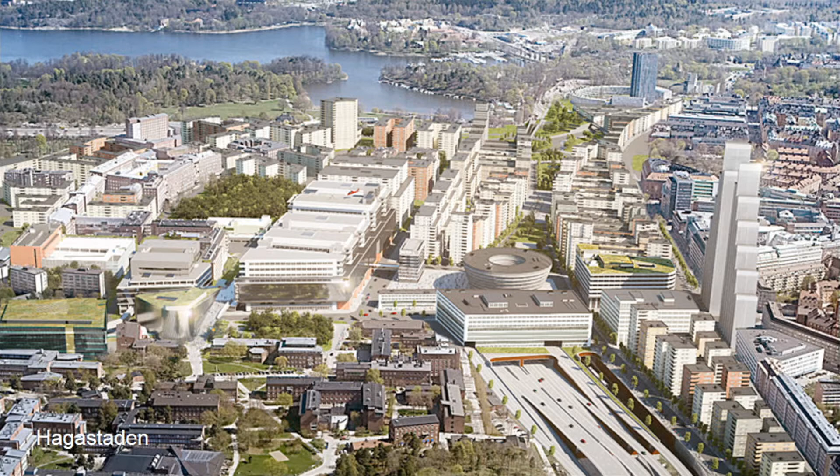We know cities are becoming more dense. That's not really a news flash. Here's Stockholm's, I guess, the most dense area we've seen planned in Sweden. It's called Hagastaden, in the north of Stockholm. The reason I point this particular area out is it's been a bit of a flashpoint with urban density and daylight regulation. Here's an example of one of the projects which has caused friction in the system.

What you see here is a very old sketch. I don't want to be too specific here. A lot of these people are my clients. They're my unwilling clients. Why? Well, they have their projects well designed 90%. They go to get their building permit, and the permit is denied. I get some very interesting phone calls from panicked people trying to fix the problem. With a 73 degree obstruction angle, it can be very difficult to fix. And actually, I see just now that there's a balcony there, so there's no view of sky there whatsoever.

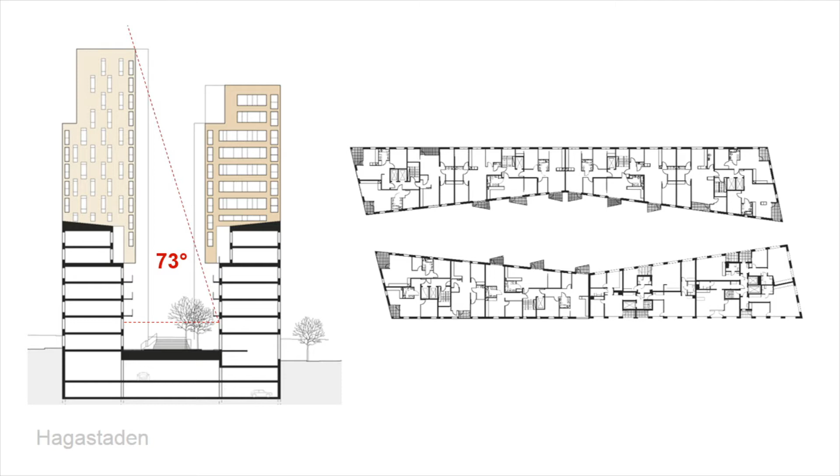So this regulation, what is it? Marie-Claude went through it, so I'll just focus on the idea of good access to direct daylight. We saw there's a daylight factor or a window to floor ratio there.

One thing we know is that the focus of the regulation is on the building level. But we know a lot of the damage is actually caused here in the early planning phases. And in Sweden, there are no daylight regulations for the early planning phase. That's where the problems arise.

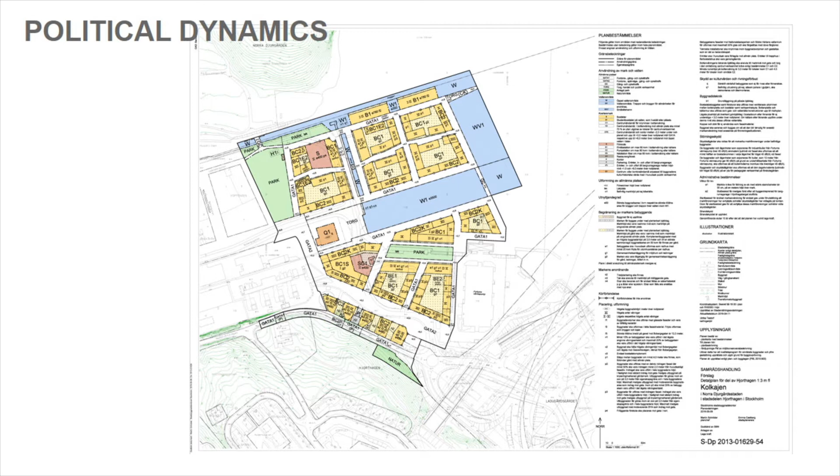So here's a bit of the political dynamic. The politicians want a tight or a dense city. They want to meet their housing quotas. So they put pressure on city planners to plan very densely. Then they pass that along to the project team, who then passes something on to the permit issuing city planners. But they, of course, have to answer to the code authorities. They're under tremendous pressure not to allow exceptions to the building code.

So there's a bit of a fight here, and essentially what happens is the code authorities, they really should be talking to the city planners, but they don't. These are the people we need to talk to. So there's a flashpoint there. These poor people are caught in the middle. So what happens? They put a stop to the building project. The whole industry is not too happy about that. There's a lot of time and money involved here, so people get upset when those two things clash.

So what's our idea? How do we fix the problem? Well, there's floor area ratio. I don't know if it's a standard planning metric, so for those who don't know, it's the ratio of a building's total floor area to the size of the piece of land it's built on. We use a definition by the Swedish Rådberg, but it's floor area ratio.

And we take vertical sky component. How many are familiar with that metric? Show of hands. Okay, I'll quickly review: it's the ratio of daylight falling on a vertical surface to the daylight available from an unobstructed CIE overcast sky. This is defined by the Building Research Establishment in those two documents. Now, this is not new, it's been around since the 60s. We are not reinventing the wheel, not one bit.

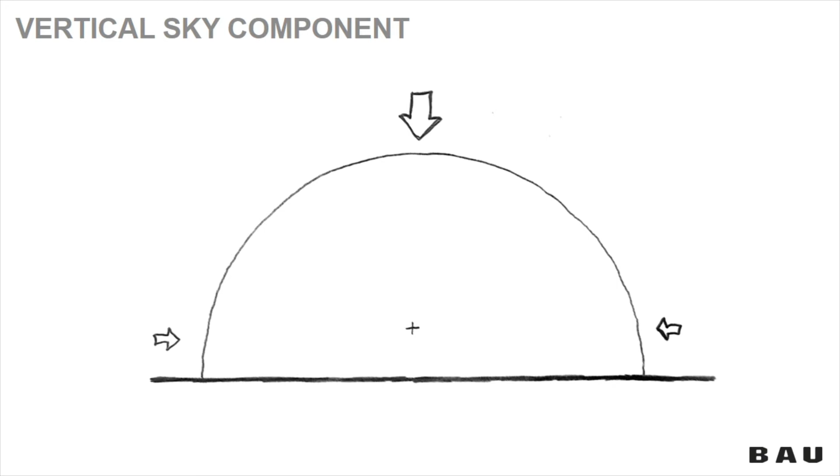Vertical sky component, a little more for those not familiar with it. There's my CIE overcast sky, which is the same sky we use to simulate for the building code, 3 times lighter at the top than at the horizon. It gets 100% VSC when unobstructed, 100% of the light falling from the sky. If I put a vertical surface up, a wall, it's obstructed, so it only gets 40% of the light from the sky. If I put another building there, it's further obstructed, 20% of light from the sky.

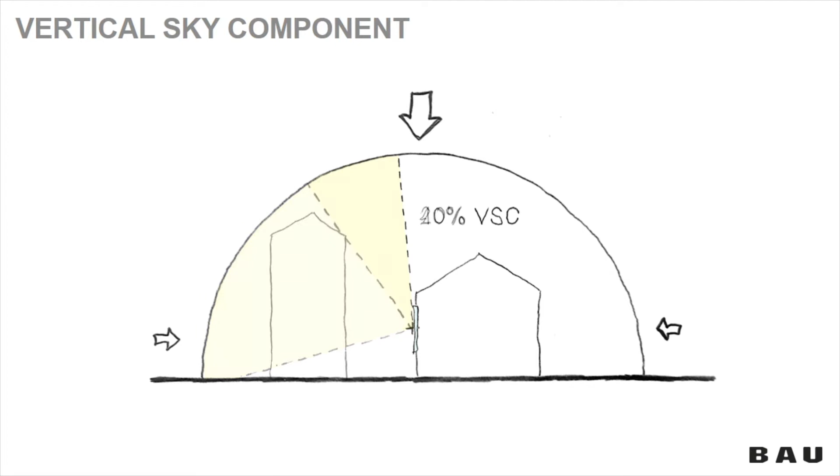If we move this to 3 dimensions, here we've taken a quick model of Victoria Station in London. You have to excuse this model, some of the buildings are hovering, this was an early test. What you see here in yellow is the 100% VSC, those surfaces receive all the light from the sky. The surfaces in green receive around 40%. And the surfaces in blue, you can see there's a range here. What it means is we know there's a point on those facades when essentially the daylight is choked off. There's none available.

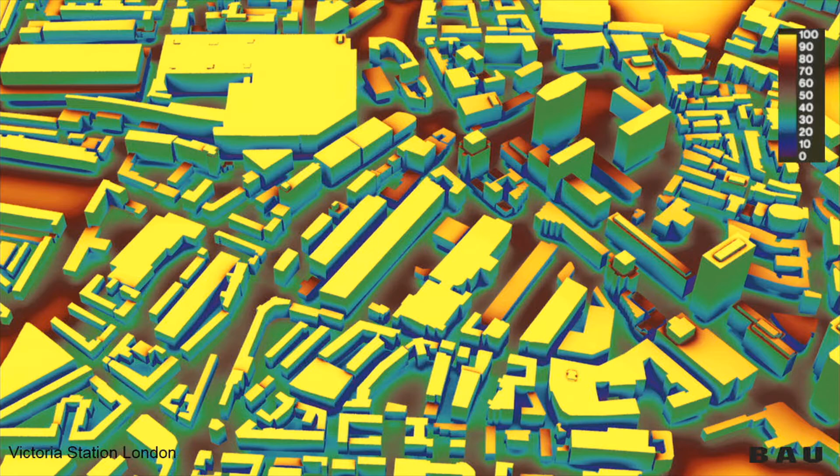So our idea, we have the two consultancies, BAU and Bengt Dahlgren, and municipal authorities on one hand. Behind us, we have Boverket, the code authorities. Unfortunately, they don't give us any money. They're not in the habit of funding stuff. But what they have provided us with is a letter of support, and that's been crucial in opening doors.

So we ring up the municipalities and tell them our great ideas, and they're already familiar with the problem, perhaps. So getting agreement from them is, in many cases, not so hard. They come back, select some neighborhoods, and give us three-dimensional data of the models of the urban districts they're interested in, along with floor area ratios.

The idea is that we will produce for them a catalog, say 30 here. We're still not sure if that's 30 or 40, or just when the money's going to run out, but 30 or 40 neighborhoods - a catalog which compares VSC against floor area ratio numerically. Now, of course, the catalog will have some nice, pretty pictures of urban districts to get the architects looking at the more intuitive pictures.

Now, we're not doing this for free. We get approximately €2,000 for the commune's participation. Does that cover our costs? Not at all - it covers maybe a third of our costs. So why do we want money from them? Isn't that just a pain in the butt? Well, no - at the end of it, we get to say, here's your study that you helped pay for, as opposed to, hey, do you want to look at our study? It's not a big fee, not a lot of money for them, but it gives us the opportunity to tell them that they have ownership of it.

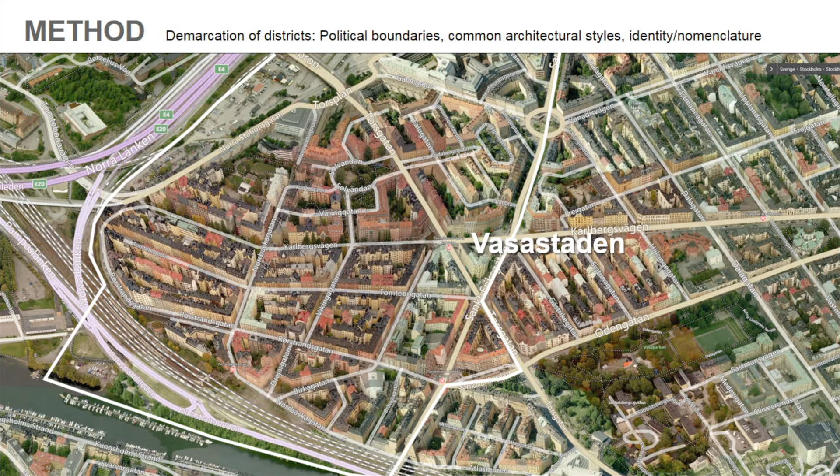So a little bit about our method. It's kind of complex when you're trying to figure out what's an urban district. We know we've got political boundaries, and here in the white you can see a political boundary - this whole area is referred to as Vasastaden. Well, how do we begin to divide that up? There are three areas, Rödabergen, Birkastan, and Rörstrand, that we've started to look at. The basic idea is we're looking for something that has an identity to the general public - so I can say, oh yeah, the Birkastan area, and people know what I'm talking about. That's the most important thing. But also we keep these districts approximately the same size, so we're talking 10 to 15 hectares.

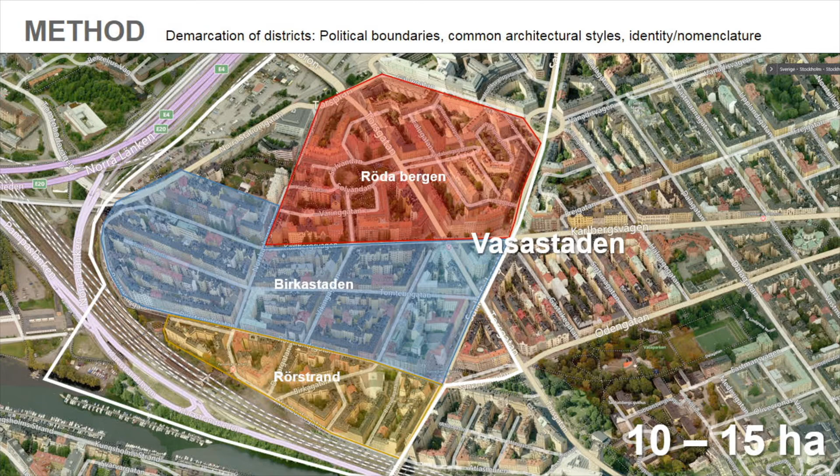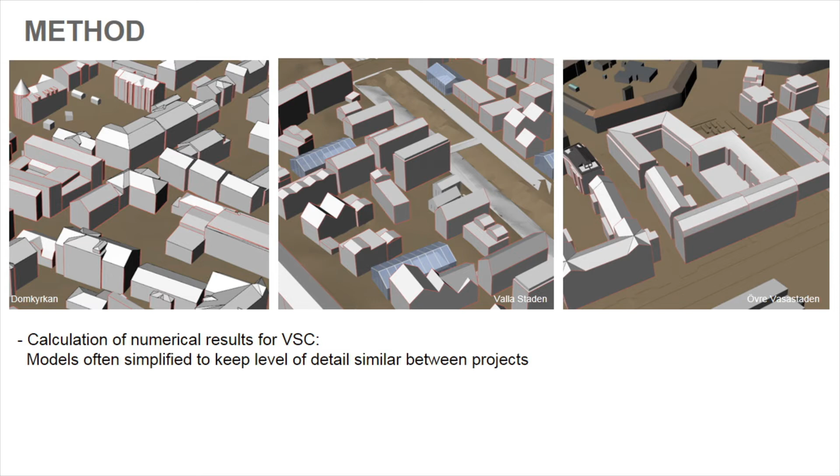Now, when we get the model from the communes, they're of differing levels of detail. So quite often - Micho, where are you? He's right there - there's a lot of simplification of the models in post-processing. This is so we can get the approximate geometries at a similar level. We do calculation using Rhino, Grasshopper with the Honeybee suite, and of course that has the Radiance engine to it, with a grid resolution of 1 meter by 1 meter.

So a little quickly, the results. We're still sort of in the middle of the project, but I'm just going to show you some of the images to start, then get into the numerics of it. Here you have a look at that Hagastaden area, and you can see these areas of dark blue. From our experience, we know that those areas are going to have real difficulty complying with the Swedish code. It would be great at the beginning of the detailed plan phase, as soon as pen hits the paper, to know this, so it doesn't come as a surprise. Because I'll tell you what - when they didn't get their building permit, they were very surprised. They had no idea.

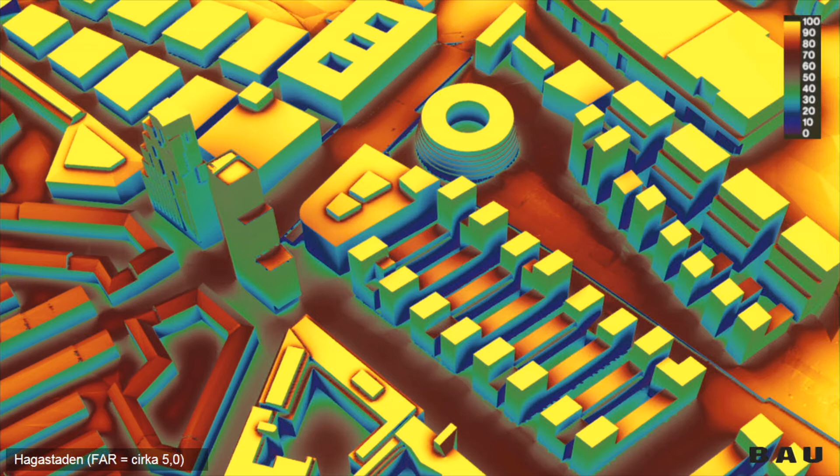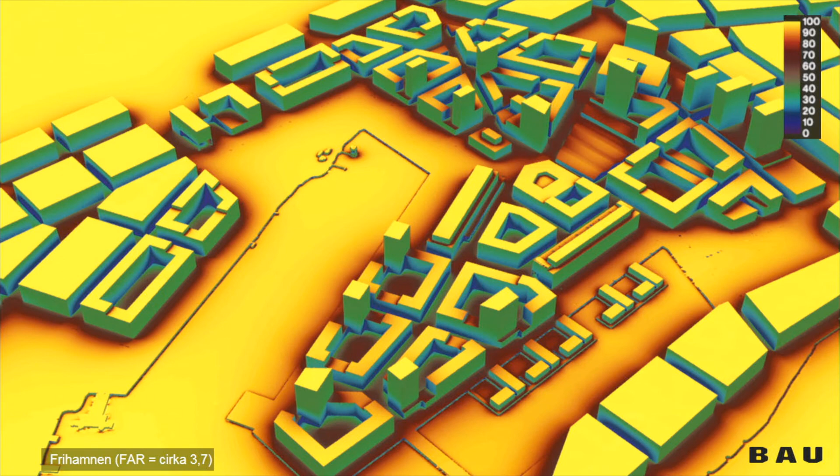Another area here, Frihamnen in Gothenburg, Vallastaden in Linköping. A very interesting one, there's a lot of focus on this project. It's a very interesting way to do urban planning, so a lot of curiosity. We haven't got the floor area ratio from them yet, but we're very interested to see where this project lands.

Now, traditionally, the BRE said, well, a VSC of 27%, you had good access. A VSC of 15%, you had limited daylight, and a VSC of less than 5% was dark. We've massaged these numbers based a little bit on our experience. So we're binning data into 3 different bins here.

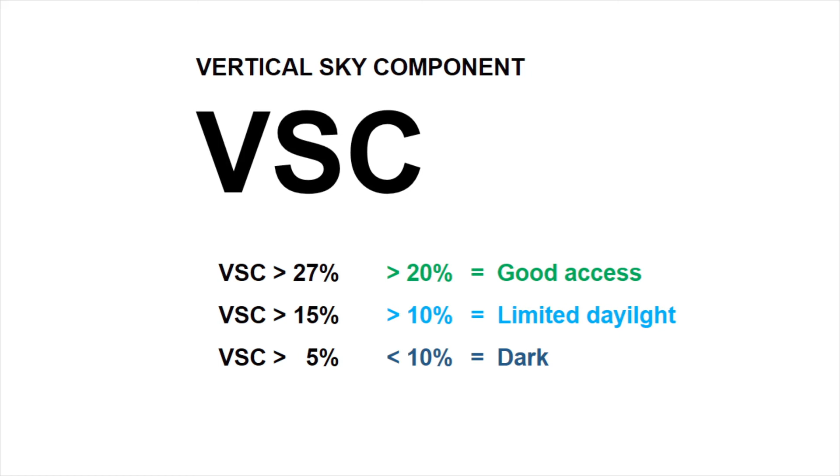So what we're saying is, on the top level, on the facade, you have your average across the facade there and your lowest floor. So here you can see on the lowest floor, 25% of the area of the facade had what we could say good access, 31% limited, and 44% dark. So in this manner, you can very quickly, graphically, compare how the projects are doing against one another.

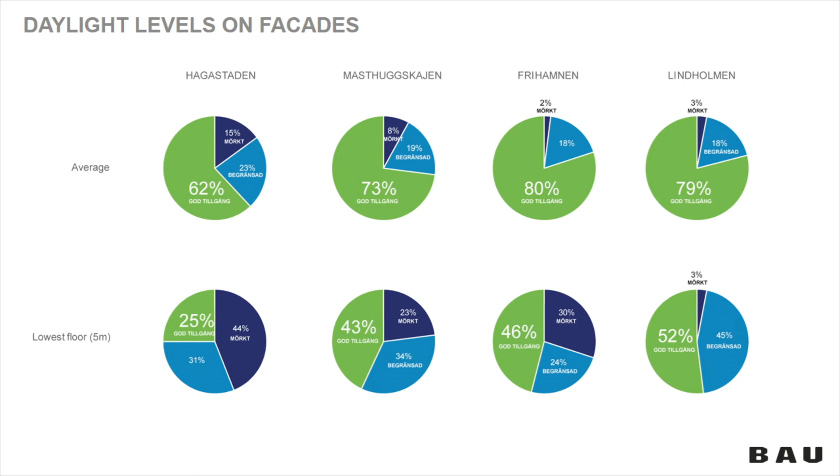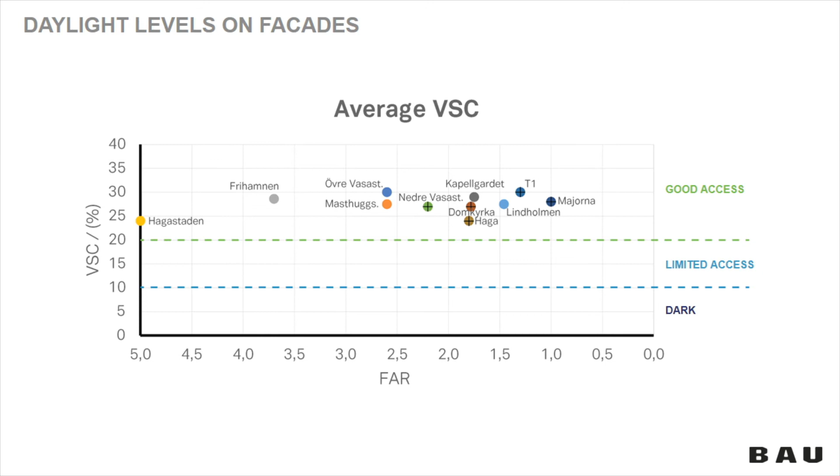And I just think, wouldn't it be wonderful as soon as you start with a planning project? Yeah, okay, I know my floor area ratio is going to be 2. What portion of my facades can we expect are going to be dark?

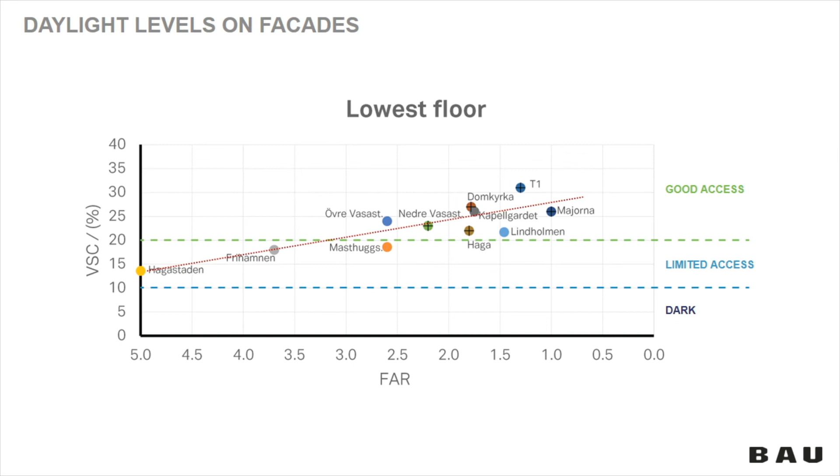So the challenges we've faced: 3D models that are poor, lacking in quality, so there's a lot of extra work; a lack of floor area ratio data; the selected area by the commune may be too small, maybe 3 or 4 buildings. We feel obligated to simulate it, but we can't really use it in our publication.

But I think when we talk about certain big cities in Sweden, not naming anybody, they're very busy with an existing workload. But there's a political pressure to meet housing quotas. That shouldn't be missed. And when they sell their land, they sell it based on how much the developer can build. So if we come in and start saying daylight's going to restrict this, there's a perception that it may not be in their interest to be involved in such a project.

This is a bit of a challenge as well. We were originally interested to see what we have, so we're looking at the existing urban districts, but actually the cities that we were working with are really interested in testing their new neighborhoods. In some ways, that's a little frustrating, but in other ways, that's actually really what we should be doing anyways. So it's a bit of a victory.

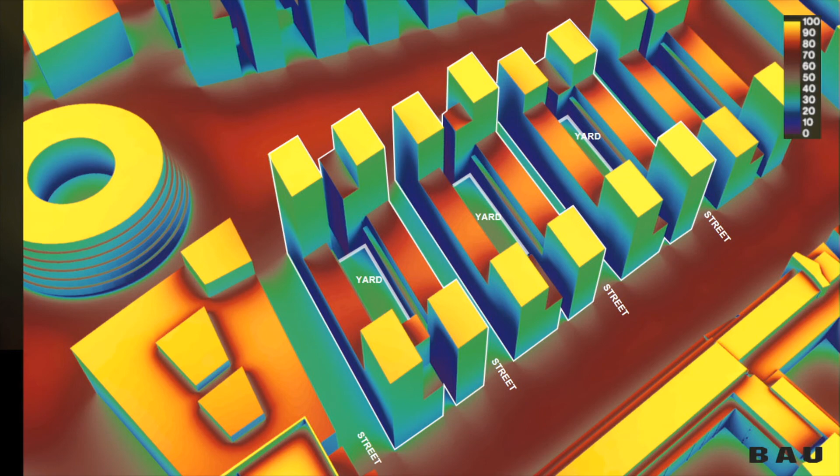So a little bit of our future directions. Here's an example of a test that we have. These two designs are different designs, but with the same density. This alternate design here had a much better performance for the VSC on the lowest floor. So you can work with this method to optimize.

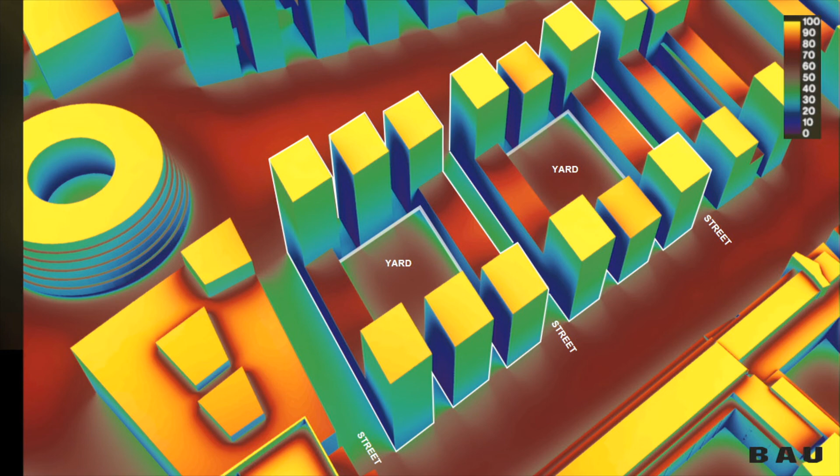So future directions: correlation between vertical sky component and daylight levels inside, which we're hoping to get a little bit from Lund; urban scale climate-based metrics after Christoph Reinhart's work; and workshops for planners.

So summary: let's face it, we're not always going to get the daylight levels that we want with increased urban density. But VSC can help the situation somewhat, both through optimization, which I just showed you an example of, but also as a tool of negotiation. Now, what do I mean by that?

Well, let's say you want a dog. You want a little dog, right? Everybody wants a little dog. And I agree, I'm going to get you that dog. At the end of the week, I'm going to deliver this little dog to you. But I can only get you a big dog. You probably want to know beforehand. You're going to ask yourself, is a big dog really what I want? Am I prepared to accept this? Okay, if the answer is yeah, well, what's the cost?

And that's sort of what we're trying to do with VSC. It lets you know exactly what you're getting early in the process, as soon as pen hits the paper, and also the potential costs of your decision. So if you say we're going to have a FAR of 5, you know that you can accept a certain percentage of dark facades right from the onset. So there's no nasty surprises in the end.